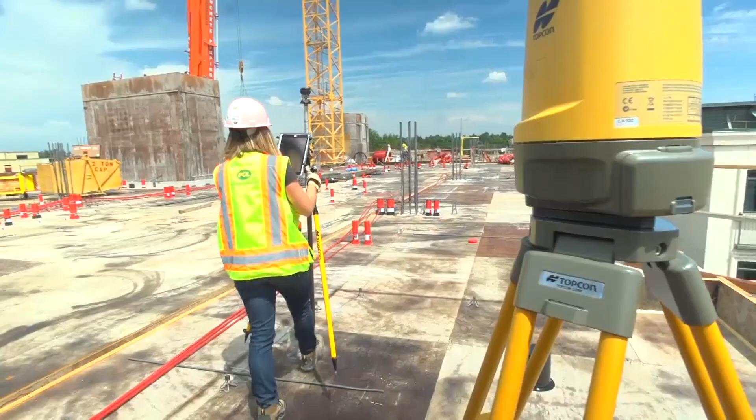You will see a number of benefits using Robotic Total Stations in your layout and quality assurance programs. You will immediately see the productivity gains. You'll see improved quality, communication between the office and field, and client handover.

Anything with risk should be met with an appropriate level of control. There are multiple uses of your Robotic Total Station throughout the construction project lifecycle. At the top level, here's a way to think about the layout and inspection process in 4 steps.

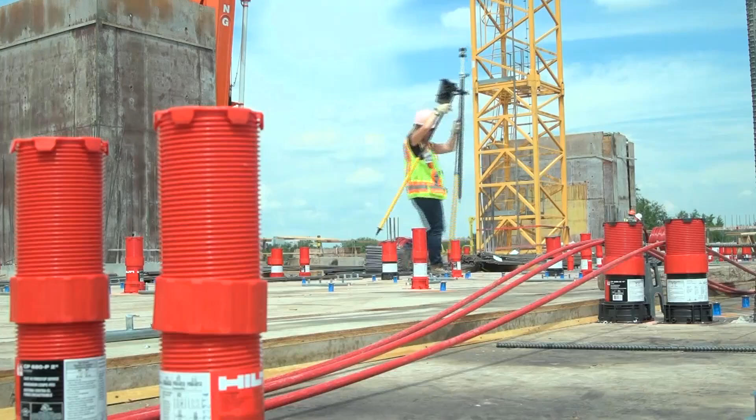After you have completed this course, you will have a strong understanding of the process of using Robotic Total Stations as part of your layout and quality assurance efforts. So, without further delay, let's get started.

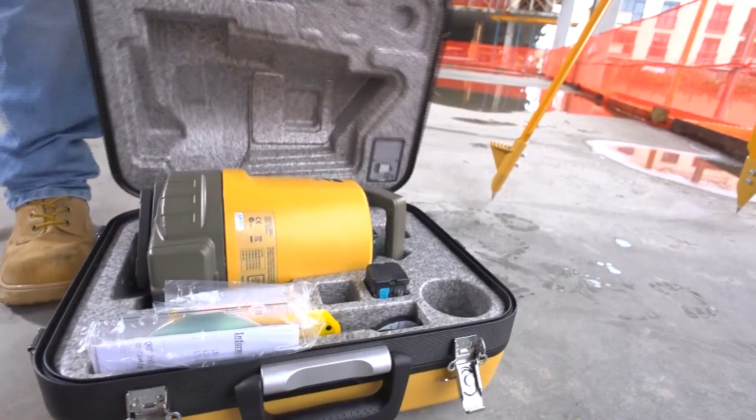This course was built primarily for main contractor project team members who spend the majority of their time out in the field. But it's also relevant to any foremen, surveyors, or site personnel responsible for laying out work or performing quality assurance verification of the placement of specific work.

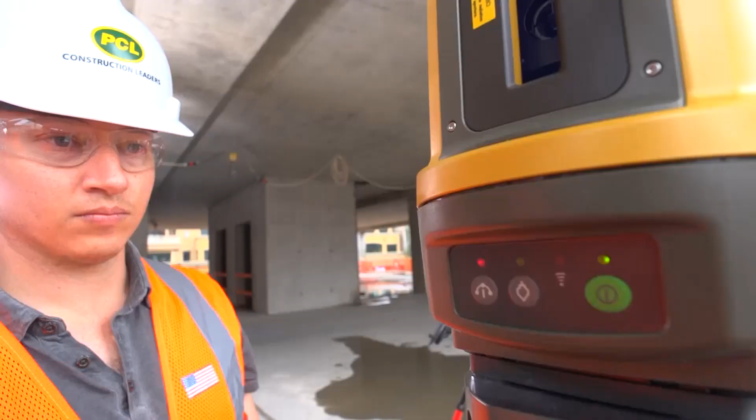Very intentionally, in this course, we will not cover the use of any specific hardware or software. Our goal is to focus on the process. Following this course, if you'd like to learn more about potential solutions, we will provide links to best-in-class industry tools that will assist you and your team.

To get started, we're going to take a look at why Robotic Total Stations are a relevant topic today and discuss the potential benefits for you and your project team. We'll then give an introduction to Robotic Total Stations so everyone has a base knowledge.

To stay consistent with the rest of the courses in the Field curriculum, we will use the PERI model to structure the rest of the course. First, we will discuss how to plan for the use of Robotic Total Stations in your layout and quality assurance workflows. We'll then take a more detailed look at how you'll execute, before we can discuss how you can leverage the digital data collected to report on project and program performance.

As we do with all of our courses, we'll finish by looking at how you can ensure a process of continual improvement.

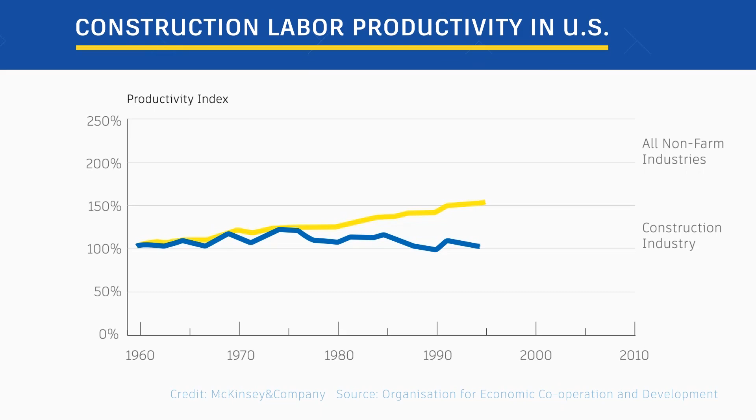More recently, McKinsey & Company, one of the world's top management consulting firms, conducted research on the construction industry and reported similar findings in both the United Kingdom and Germany, demonstrating that this was a global challenge. There are a number of factors contributing to this challenge.

According to a thought-leading construction firm from the Americas, one of the factors is that buildings are getting more complex. You rarely to never build the same thing twice, so you're always working on a custom project. Even if you were to build the same structure, the site is different, conditions are different, there's always something different.

One of the industries with the most positive productivity gains over time has been manufacturing. They conversely will often produce the same product over and over again from a controlled environment.

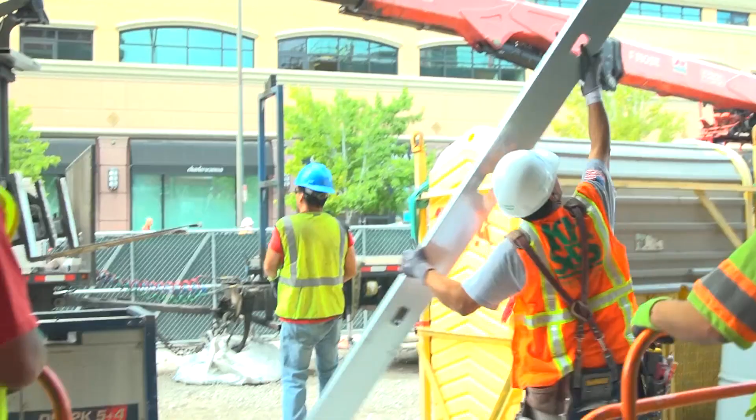Construction has recently begun adopting a number of techniques from manufacturing with the emergence of lean practices, prefabrication techniques, and modular construction. The other big trend we see is the increased use of robotics in construction. The idea being that if we can automate a task with robotics, we can not only address this productivity challenge, but also improve safety and quality.

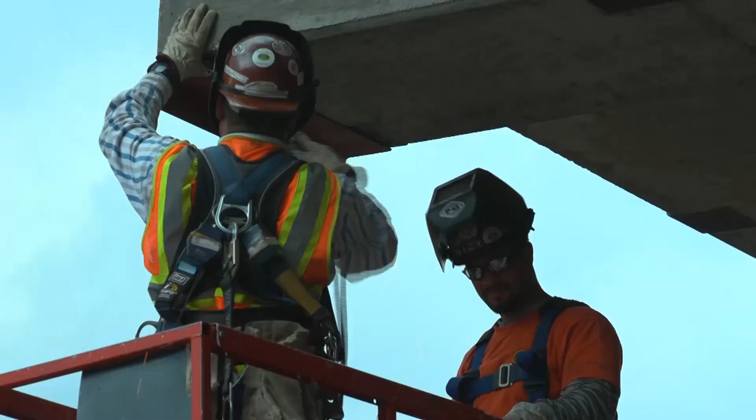Here are some uses of robotics we see in construction today. Unmanned vehicles like trucks and drones, coupled with machine guidance, are being used to not only deliver materials, but also to perform precision earthwork. Special purpose robots are being used for demolition, welding, cutting, drilling, affixing, and even bricklaying. This allows tradesmen like masons to focus on quality, safety, and machine tooling, while the robots do the heavy lifting.

Some uses of robotics are being used to help improve our own physical capabilities. For example, there are exoskeleton suits that help support the weight of heavy tools.

3D printing technology with robotics that can print nearly any shape you could draw largely defray the traditional cost of creating custom parts. These robots are becoming more sophisticated in the materials that they can print and how easily they're tied to design and automation software. In 2015, Autodesk was part of a partnership that 3D printed an intricate steel bridge.

Instead of trying to address all of these types of robots, who are very relevant in construction today, we're going to narrow down our focus for this course and talk specifically about robotic total stations.

You will see a number of benefits using robotic total stations in your layout and quality assurance programs. You will immediately see the productivity gains we discussed earlier, but in addition, you'll see improved quality, communication between the office and field, and client handover.

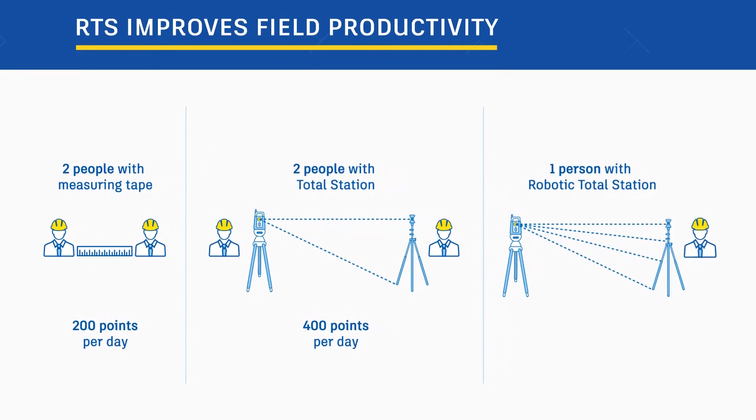You'll find productivity gains both in performing layout of work, but also in the speed of performing quality checks. Any given day, a team of 2 with tape measure and string might average layout or verification of 200 points. With a total station, that same team will average 400 points. With a fully robotic total station, you only need a team of 1, and you're able to lay out an average of 600 points per day. That's nearly 600% more productive.

What is interesting about this is what we decide to do with the time that's saved. One side benefit of going from a 2-person to a 1-person system is that the reduced crew size and time on site leads to decreased risk and improved safety. Resultantly, you'll see improved quality, both through the increased accuracy and additional quality checks you're able to perform with the time saved from improved productivity.

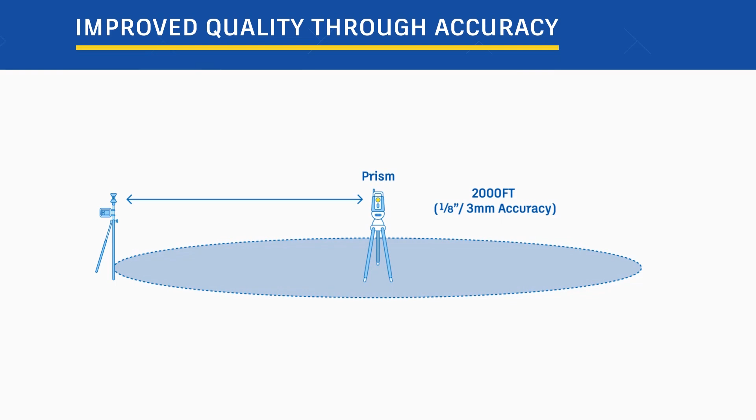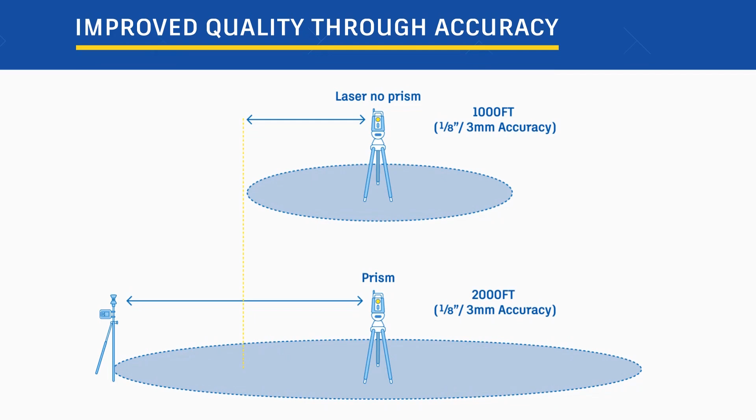Your quality checks will have improved accuracy through the precision measurement of your robotic total station. This precision depends on the way in which you are marking or validating a point, how far away the point is from the robotic total station, and of course, the specifications of your robotic total station. As a rule of thumb, you can get within 1/8 inch, just over 3 millimeters, of accuracy from 2,000 feet out, using a prism and pole. And if you just shoot a laser and are prismless, you can get within 1/8 inch from 1,000 feet out. Of course, if you are at closer range, you'll get increased accuracy.

Since you're more productive with a robotic total station, you can increase the number of points being validated, increasing the probability that you catch something out of conformance and decreasing the risk that something was missed.

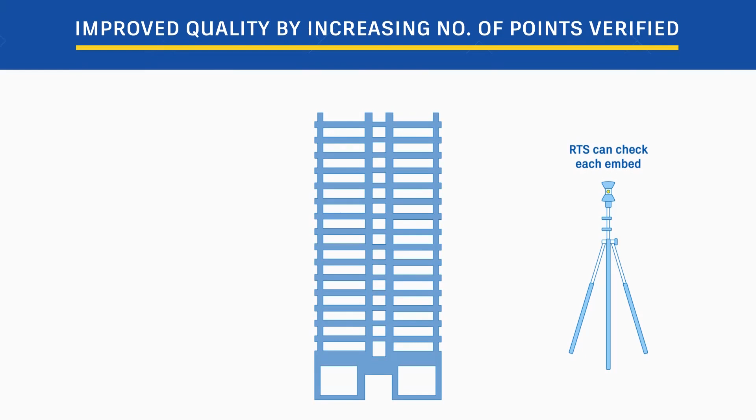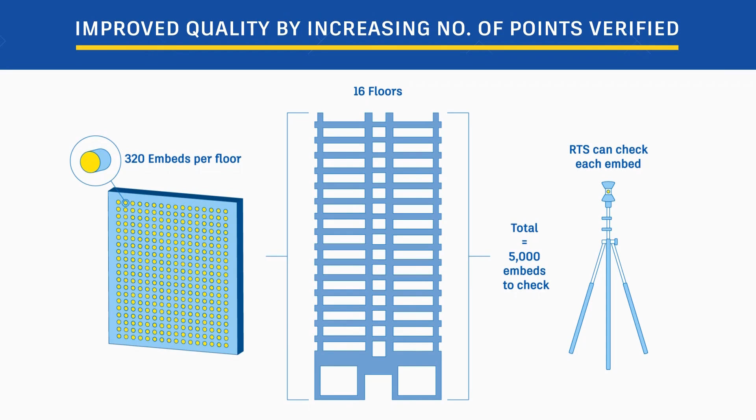On a recent high-rise condo project, a team was using their robotic total station to quality assure curtain wall embeds. There were 320 embeds per floor and 16 floors, totaling over 5,000 embeds to check. Without a robotic total station, they would have verified a sampling of them. But in the same time, with their robotic total station, they were able to check each and every one. Turns out they found 3 misplaced sleeves that required rework, which cost a couple hundred dollars per sleeve.

If they hadn't caught them before pouring the concrete, later in the project they'd have had to scan the post-tension deck for cable first, and then core drill to resolve the issues, costing the project thousands per sleeve on top of the scheduling delays and headaches.

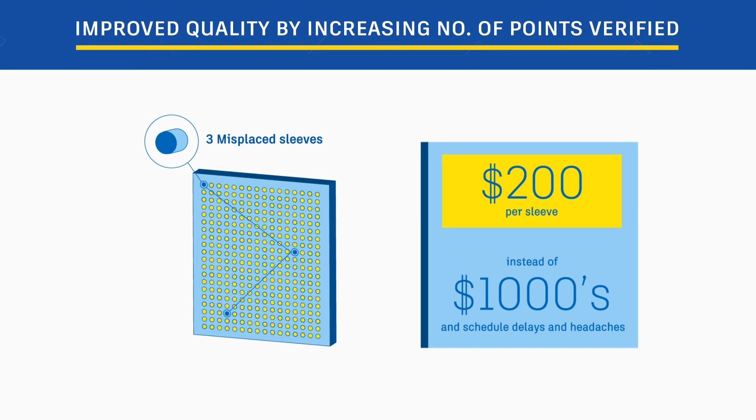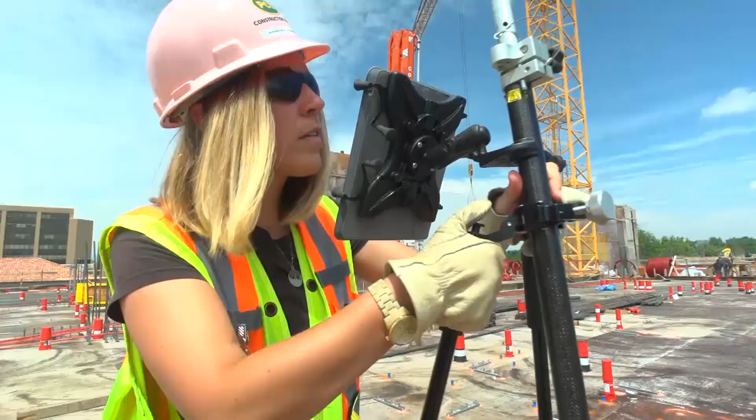Your layout and quality assurance procedures with a Robotic Total Station tighten both the efficiency and communication between your team working in the job office and your team out in the field. The team in the field has improved access to the most up-to-date design information without having to run back and forth to the job trailer, and the team in the office has a better understanding of the real-world conditions and construction progress.

One of the Contech Academy partners from the United Kingdom defines work completion in their quality assurance program as only once work has been verified. They don't pay for work installed. They only pay for work that has been verified.

They have a tight tie between the field verification back to the job office schedule and consequently payroll system. They set up site control and provide their subcontractors access. Then they have their trades use Robotic Total Stations to document the location and effectively completion of their work.

Additionally, you're able to improve the value of your handover. By leveraging the as-constructed information, you can find discrepancies and improve your design information to represent as built rather than as designed. As you can see, there are many benefits to using Robotic Total Stations on your projects.

When one of the Contech Academy partners was first piloting a Robotic Total Station solution, they were working on a project in Hawaii where they were self-performing precast for a parking structure on an educational project. Each of the precast components had a dowel grouted into the sleeve, so that these panels, which were being prefabricated off-site, could arrive and get plugged in.

With 875,000 dowels on the project, based on prior experience, they built in some contingency for a percentage of the dowels being off with natural error, and expected they'd have to rework them by chipping away at the grout, repositioning, and then re-epoxying them so the prefabricated panels would fit.

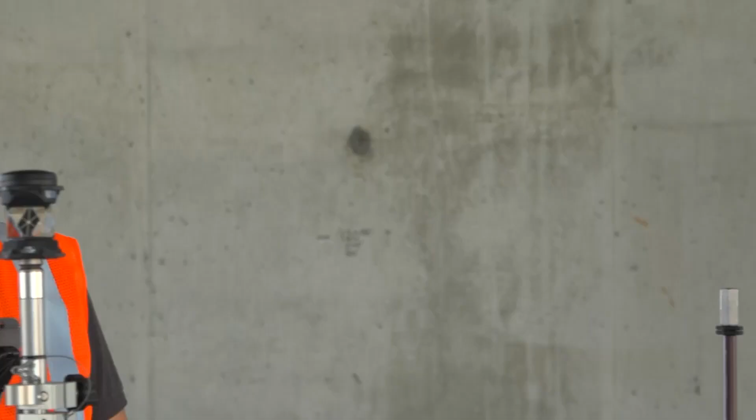Well, using the Robotic Total Station to position the dowels, not a single one had to be reworked. All panels were assembled without delay as soon as they arrived on site, and they completed that body of work 2 weeks ahead of schedule.

Not only did they not incur the cost of reworking the dowels, but they had a number of benefits from completing the work 2 weeks quicker, including the crane rental that was hoisting the panels.

Counting the cost of the Robotic Total Station, which they had rented for the project, the software they purchased, and training for their team using the tool for the first time, the project manager reported back to the business that they had over 10 times return on their investment.

And this was their first project using it, so they had a bit of a learning curve. You can see in this example the productivity gains, as well as improved quality and reduced risk.

What is even more interesting is that this new technique has changed what future bids have looked like, having adjusted their fee strategy.

In this chapter, we've now covered why Robotic Total Stations are relevant in construction, and given some examples of benefits you might receive from its use.

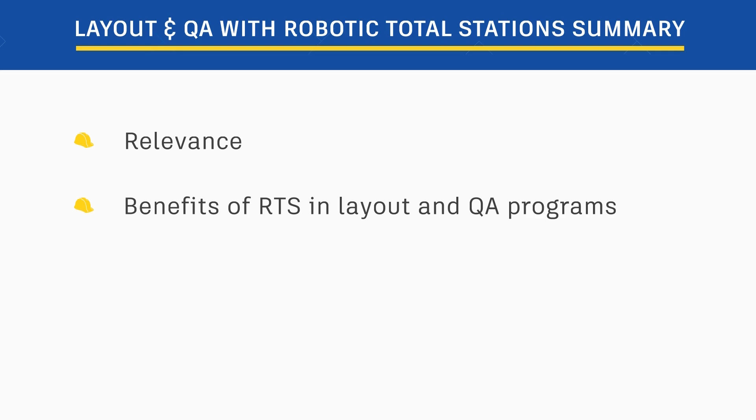In this chapter, we'll give an overview of Robotic Total Stations. We'll discuss some of the basic components, how they're used at different points in the project lifecycle, and then talk about picking the right tool for the right job.

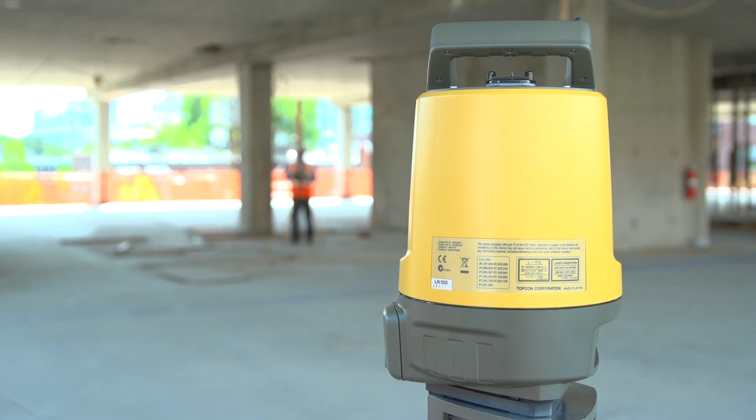Robotic Total Stations vary from a classic total station in that they allow the operator to control the instrument remotely, eliminating the need for a second teammate.

The Robotic Total Station will sit on top of a tripod, traditionally positioned over a known point, commonly referred to as your control point. Establishing control on the site is one of the most important topics we'll cover in the coming chapters. The Robotic Total Station and tripod are stationary, but the Robotic Total Station will rotate around and look up and down to find the point you're verifying or laying out.

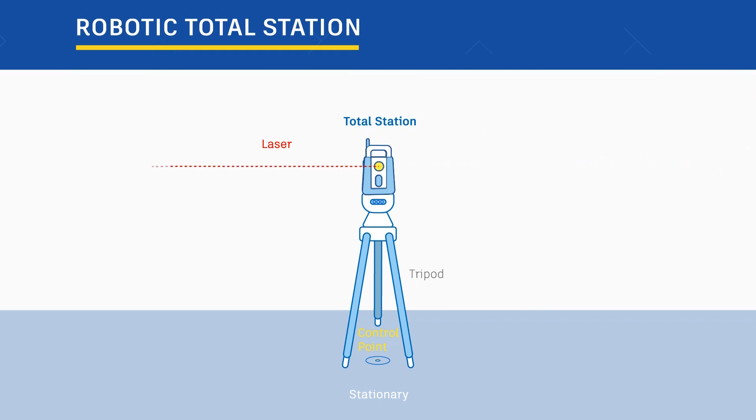The surveyor, foreman, or perhaps site manager will carry around a prism pole. Affixed to the top of the prism pole is the prism. This is what the Robotic Total Station looks for and can follow around by locking onto it with a laser beam.

Once the Robotic Total Station is locked on the prism, when you move the prism, the Robotic Total Station will follow it. When laying out or quality checking the location of a point, the operator uses the data collector or field controller to help navigate, position the bottom of the pole on the point, and then place a marker if laying out, or capture the actual real-world coordinates of the point if performing a QA check. Both the Robotic Total Station and the prism rod have leveling bubbles to aid this.

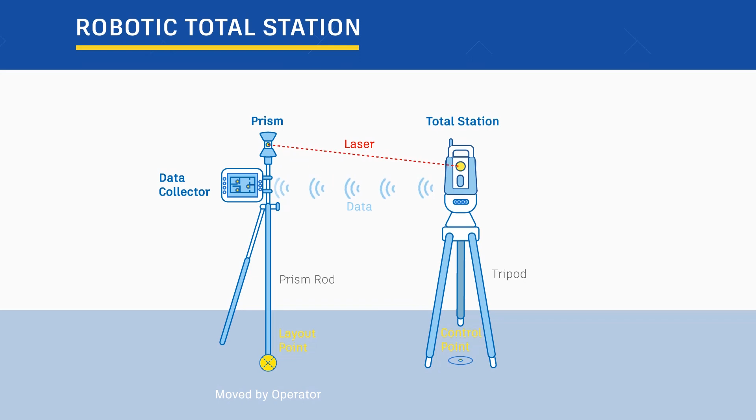The Robotic Total Station shoots a laser at the prism and uses that to keep track of where it moves. The data collector or field controller on the prism pole and the Robotic Total Station send data to one another. Instead of covering setup in this course, we've added a guide to the attached course resources that covers how to set up your total station. Setup procedures may vary slightly from one hardware unit or vendor to another, so I recommend you leverage your vendor to help you get set up the first time you use a Robotic Total Station.

There are multiple uses of your Robotic Total Station throughout the construction project lifecycle. During feasibility, design, and planning, you want to survey and document existing site conditions for analysis. This may be for basics like understanding boundaries, setbacks, and easements, or for understanding existing conditions for design and planning purposes like understanding your grade.

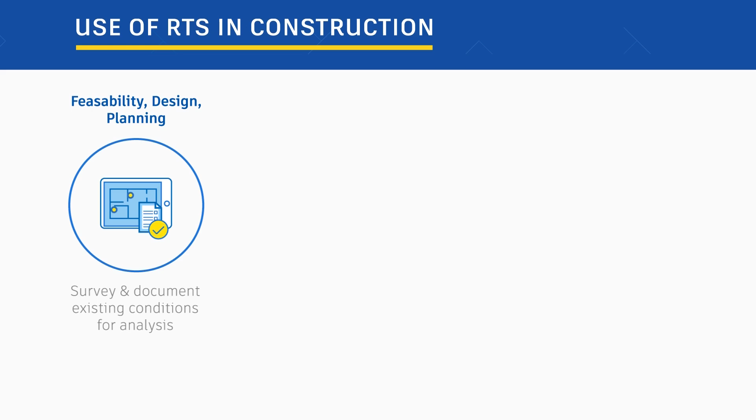Before particular bodies of work are performed, you may use your Robotic Total Station to locate and mark control points from which further measurements are referenced. You'll then want to mark off where the work should occur, using it to lay out, also referred to as setting out or staking out.

Well before you pour your concrete pad, you need to set up formwork so your trades can come place rebar and rough in. You or your subcontractor may use your Robotic Total Station to mark off where formwork is set up, or perhaps where embeds or sleeves should be positioned.

After work has been performed, you'll use your Robotic Total Station to validate that it's placed in the correct spot. Before you pour the concrete, but after your trades have put in place all their work, you must double check the formwork is properly set up or hasn't been disturbed, especially if you have an irregular shape with an arc or angles. You'll also validate or quality assure the actual placement of the embeds and sleeves.

After the concrete is poured, you can use your Robotic Total Station to perform a surface analysis on the slab to make sure there's no slumping.

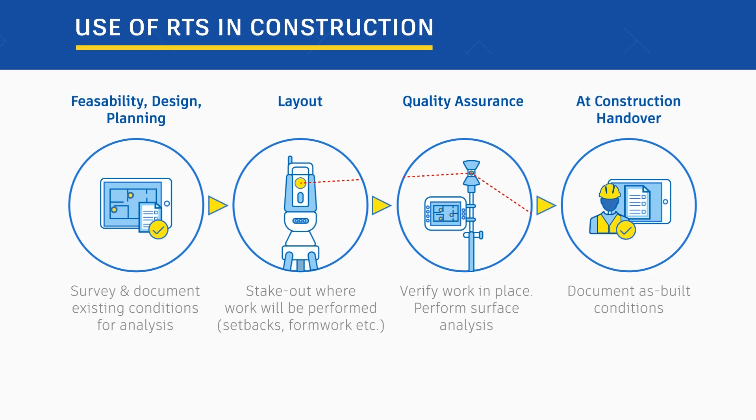At handover, you can improve your client deliverable. Leveraging actual conditions captured, the design documents can be updated for accuracy to reflect as-built conditions with regard to placement of utilities or assets, for example.

It's important that you pick the right tool for the job. Now that we've covered some example uses of your Robotic Total Station over the course of the project lifecycle, think about what your project team or teams will be using the machine for. There are a number of factors to consider when comparing Robotic Total Stations. Here are some you should think about with regard to your particular use.

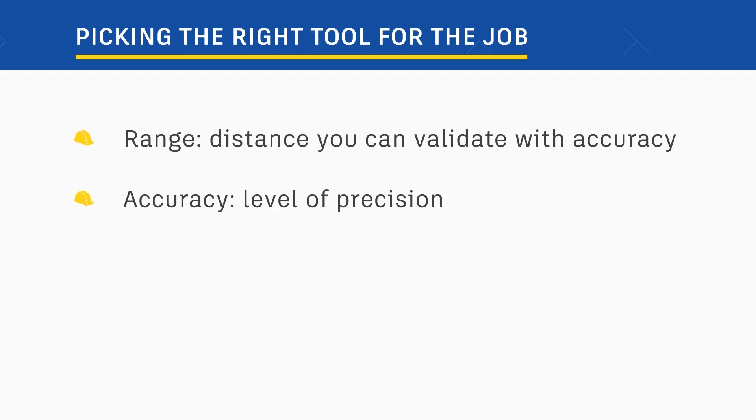Two of the most obvious are range and accuracy. Range speaks to how far away the Robotic Total Station can validate points with the level of accuracy you require. You should think about the average and maximum distance between your known control point and the points you are laying out or validating, and what level of precision accuracy you'll need.

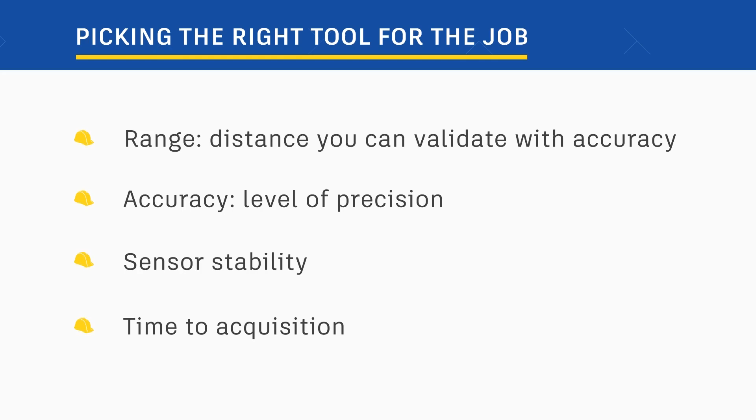Sensor stability is an important topic, but it isn't always thought of. You want to get set up, have the Robotic Total Station find your prism, and then get on with your work without interruption. In real-world practice, there are going to be some disruptions. Maybe someone walks between you and the Robotic Total Station, or you walk around a column and lose what is referred to as lock on your prism, and so you have to reacquire it, which takes time and disrupts your work. Some Robotic Total Stations manage this better than others.

The time it takes the robot to find your prism, also known as time to acquisition, determines how quickly you can recover from an interruption.

Battery life of your robotic total station should be considered. Carrying around a couple extra heavy-duty batteries so you can get a day's worth of work done in the field without coming back into the project office is a hassle.

Basic ease of setup of the entire unit, including both the hardware and the software, is a factor. The hardware for setup of the unit, and software for its ease of getting the design information and point verification data to and from the robot, is important.

Most software tools have a basic level of compatibility with all the major hardware vendors through basic information exchange, but more detailed access to the design information for reference is very helpful to your field team. Some systems will only give your field team basic grid and column lines. Others will leverage 2D design information, and the best systems will give you access to 3D design information.

The communication range, or distance and accessibility of design and point information, is important. Some robotic total stations require reliable access to Wi-Fi, which is not always feasible. Other systems might rely on Bluetooth communication. You'll find that if you can get a reliable Wi-Fi signal, you'll have more responsive navigation.

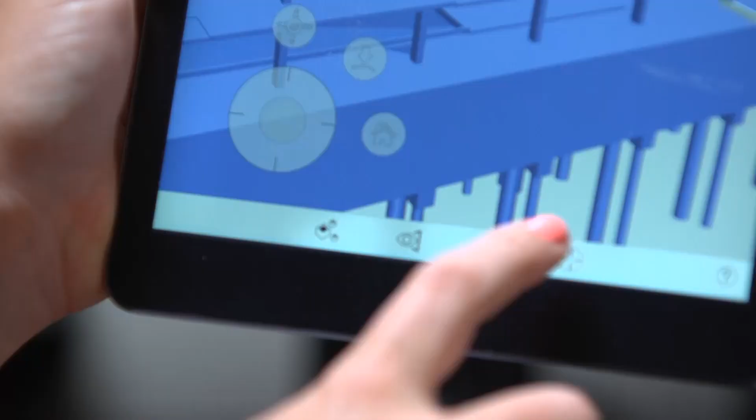First things first, you have to plan out what you're going to use your robotic total station for. You need to know where you're going to set control points so that your design team has time to incorporate those points into their design documentation. If they know about which points will commonly be validated ahead of time, they can embed them into their design tool families, so they're always there automatically.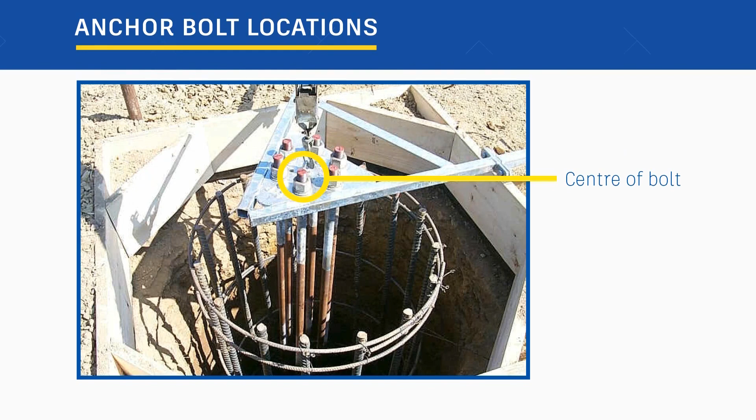As a starting point, some very commonly laid out and verified points are anchor bolts, embeds, edge of slab and footings, wall studs, hangers, piping sleeves, stub ups, or any penetration points.

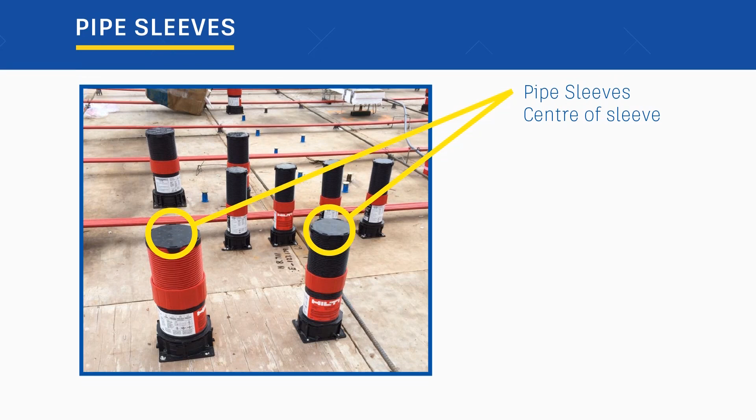Once you've decided what is worth checking, you want to be realistic about where you'll check them. For example, you may agree that you will validate the top center of an embed plate, or the center of the track for drywall studs. Traditionally, sleeves and embeds are almost always verified, since they are so important, but other things may be less important or span a large area, so you will want to pick some sample points. For example, you may only shoot 5, 10, or 15 points along a run of utilities.

Developing more formal guidelines for deciding what points will be laid out and what points will be quality assured and verified on a particular project will help you keep your team on the same page and create a baseline standard for quality. Often, the design and quality teams will work together early in the project to set some basic standards of types of components that require points so that the design team can easily incorporate them.

Then, as the project team moves to the execution phase and work begins, every project is unique and things are going to happen. There'll be changes, or perhaps particular trades start having a hard time, and your original plan may need to account for these factors.

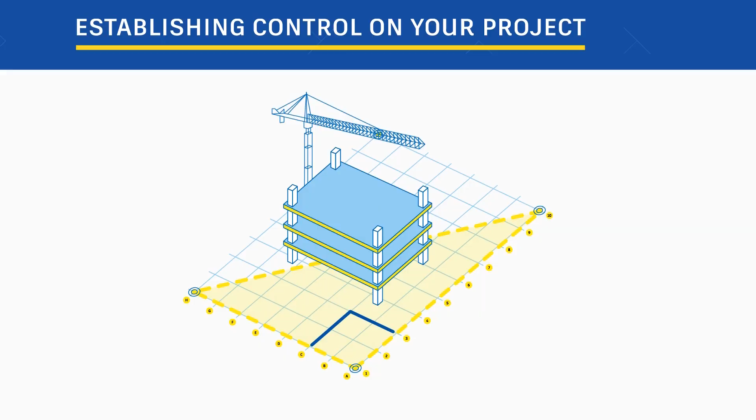Establishing control on a job site is the act of physically checking all the control points necessary to continue your work. Never trust that control points are accurate until you have checked them yourself.

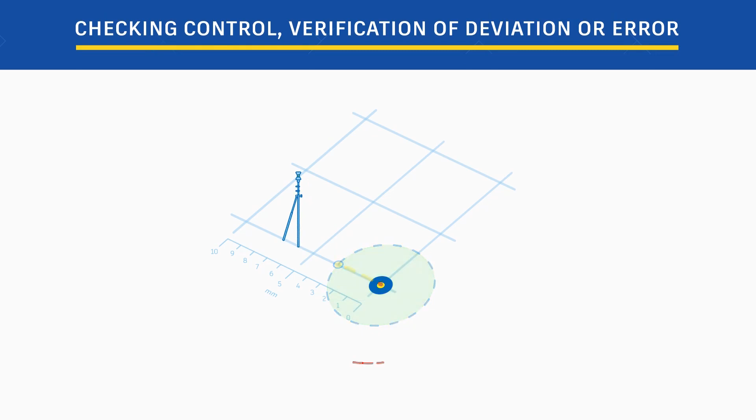When checking control, verify the error or deviation between the design file and the total station measurement. A deviation of 0 is optimal, but normal real-world conditions will leave us with about a 3 mm or 1/8 inch deviation. Deviations of 6 mm or 1/4 inch or more need to be verified and noted.

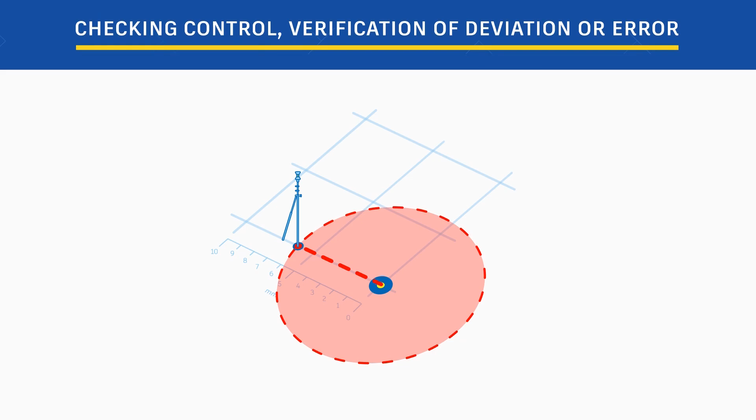Best practice is to check the distance between 2 points as well as the angular accuracy with respect to a third point. When your team is deciding where it will place control points, think about accessibility and longevity.

For accessibility, think about where you will have points you are going to want to lay out and verify with consideration of line of sight. For longevity, it's best to establish control that will last. Every time you move control points, you're opening the door for error.

Successful layout and location validation, with or without a robotic total station, requires strong collaboration among stakeholders. The design team needs to be on the same page with one another, and then they need to ensure there is strong collaboration with the field team.

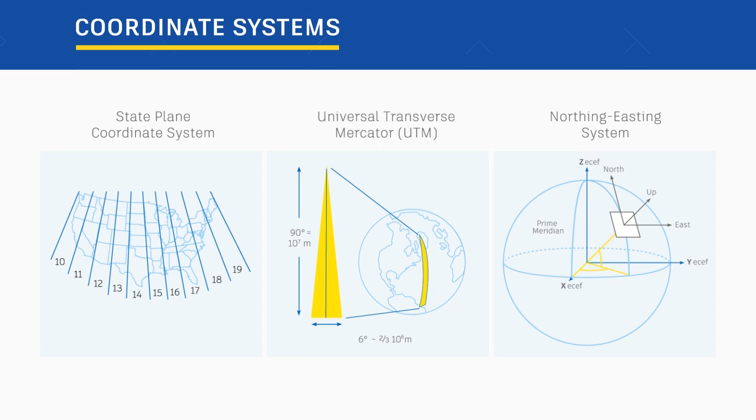For your design team, alignment starts with ensuring all design team stakeholders are working off the right coordinate system. They may leverage state plane, Universal Transverse Mercator (UTM), or a northing easting system. We won't cover this in detail in this course, but instead have added reference resources to help your design team.

The design team also needs to ensure strong collaboration with your site personnel who are carrying out the work and the validation. This starts by working with their QA and site team to identify what points are worth laying out or validating so that they can ensure they're represented in the design documents. Constructability reviews are a great forum to have these types of conversations. Then, throughout the project, there should be regular bi-directional communication.

The design team ensures the field team has access to the most up-to-date design documents at all times and is sure to highlight any changes, while the site team feeds back real-world conditions and raises issues for conversation when constructability and design are out of alignment.

For your site team, just as important is alignment with their trades and subcontractors. They need to ensure the design information is communicated and there is clarity. Also, they need to ensure there is an expectation of level of quality and what controls should be in place. Often, the trades and subcontractors will be the ones using the Robotic Total Station for layout and their own quality assurance, so the main contractor will want to make sure that site and project control are properly established and accessible to them.

In this chapter, we covered a number of the things you'll want to plan for heading into executing on your layout and verification processes with Robotic Total Station. We discussed how to determine what points need to be laid out or verified, establishing control, and ensuring alignment among stakeholders.

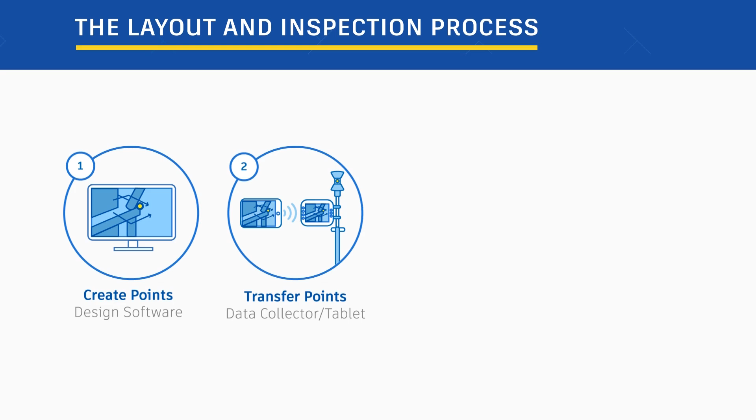Both the process of laying out and the process of quality assurance validating points with your Robotic Total Station are the same. At the top level, here's a way to think about the layout and inspection process in 4 steps. Step 1, point creation. Your design team needs to represent or create the points in the design documentation. Step 2, transferring points. That information needs to get transferred to the Robotic Total Station or Data Collector. Step 3, capturing points. Your team needs to perform the actual layout or validation of those points.

Step 4, analyzing point data. The actual real-world information about those points needs to be synchronized so that it can be analyzed and managed appropriately through reports. In this chapter, we'll cover how you execute a layout and inspection process with Robotic Total Station, focusing on the first 3 steps.

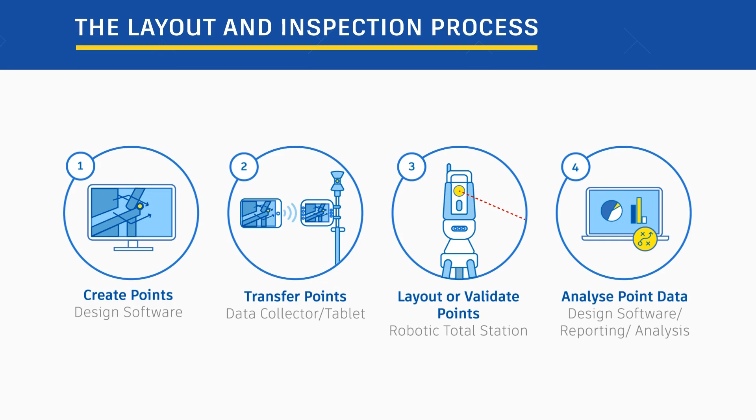Your design team needs to ensure that all points you want to lay out or validate are represented in the design documentation. This can be done in both 2D and 3D design information. You'll need to be involved in this process so that when you are out in the field working with this information, you understand what they are giving you to work with.

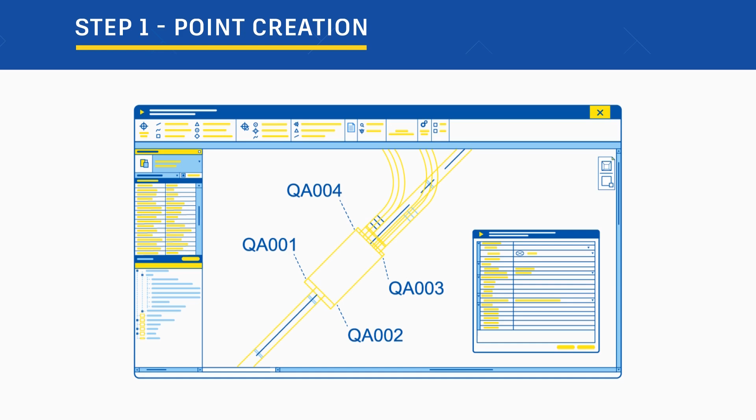Looking at the makeup of a point, there are some common attributes that you want to be familiar with and in sync on with your design team. First, make sure you have alignment on the coordinate system and format. Then, all points should be categorized properly. At a base level, there should be different representation of control points, points to layout, and points to quality assure. All points should have a unique identifier, usually formatted with a prefix and then a number. For example, CP001 might represent control point number 1, and QA0034 might represent QA point number 34.

Other teams may adopt a naming convention that helps describe the object being laid out or verified. For example, QA-SW-001 would be a quality assurance point of a shear wall number 1. Two common prefixes are STK for a staked out point and AB for an as-built point.

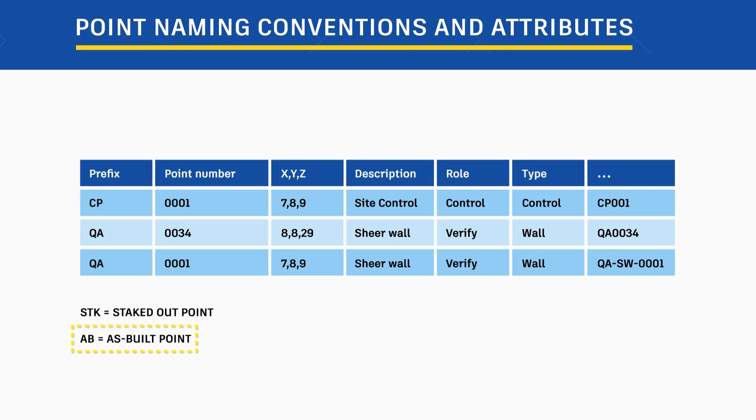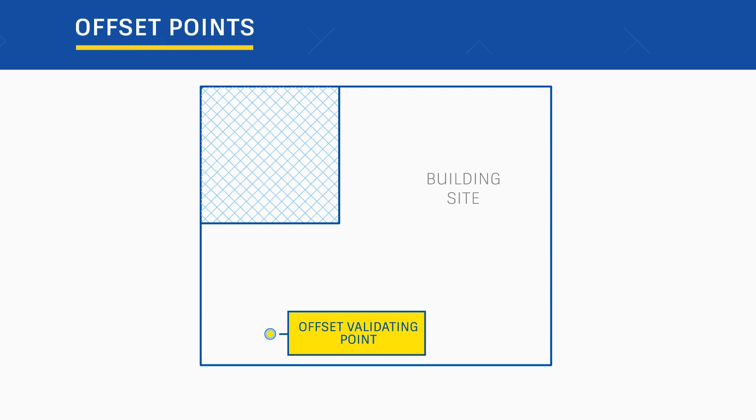Another special type of point is an offset point, which is used when you can't safely access a particular point or it's easier to validate an offset. For example, you might have an elevator shaft and want to verify the opening, but there's a fence around the opening. So thinking ahead, the point is created as a 4-foot offset point from where the opening is to keep the team safe while QAing.

Then, each point should have a property that designates the intended or design coordinates, and a separate place where the actual or real-world coordinates are captured. This is used to determine if there are any differences out of range of a particular tolerance. Optionally, each point might have information associated with it, like description or assignee, representing the person responsible for performing the layout or validation.

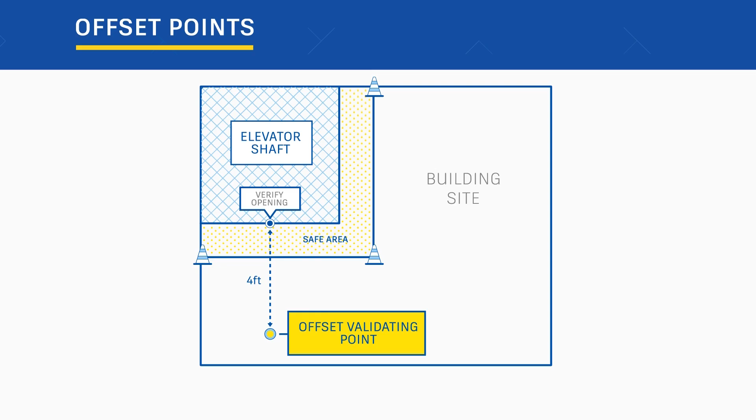Many design software tools have add-ins to facilitate the rapid and accurate creation of points in your design documentation. Of course, points can be inserted manually, but they can also be created as an embedded part of pre-drawn components or model elements. This means that when such objects are added to the design, the points are embedded automatically. Further, you can create a large number of points all at once by creating a rule. For example, you could create a quality assurance point at the center of the opening for all sleeve objects greater than 200 millimeters or 8 inches in diameter in a design file.

Once points have been created, they need to be transferred out to the Robotic Total Station and Data Collector. You'll give it two sets of information. One is the points that have been created. The second set of information is the background design information, including information like scaling.

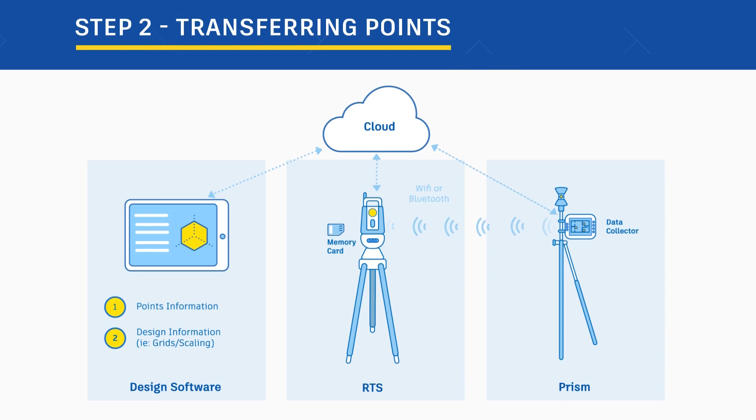Sometimes this design information is basic line work like grid lines. Other times, it's a 3D model. It should be noted that some hardware manufacturers' layout software can only handle certain file sizes and types.

In the simplest form, all layout software, regardless of hardware manufacturer, pretty much universally will accept both the import and export of point information and the design information as CSV or TXT files. The lowest technical way this import and export occur is through a memory card.

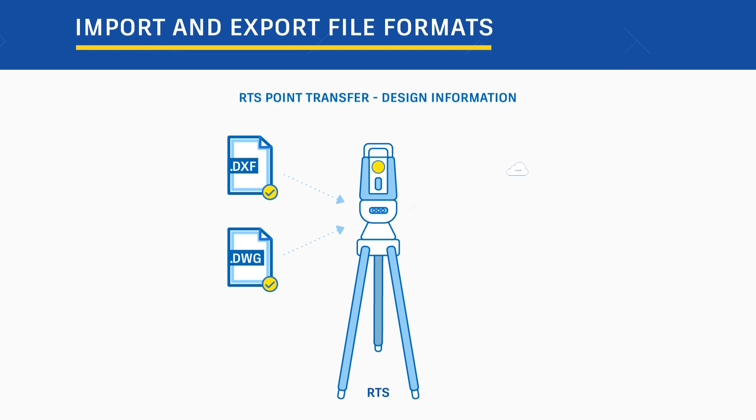Most robotic total stations will accept at least 2D design information using DWG and DXF files. The easier and more common way information is passed in most modern machines is through some cloud-based solution that can synchronize.

Most of the new robotic total stations will accept a 3D representation from a building information model so that you can better visualize where points are or should be. When passing in DXF, DWG, or building information models, be sure that you have set the scale properly, including setting unit of measure, feet and inches or meters.

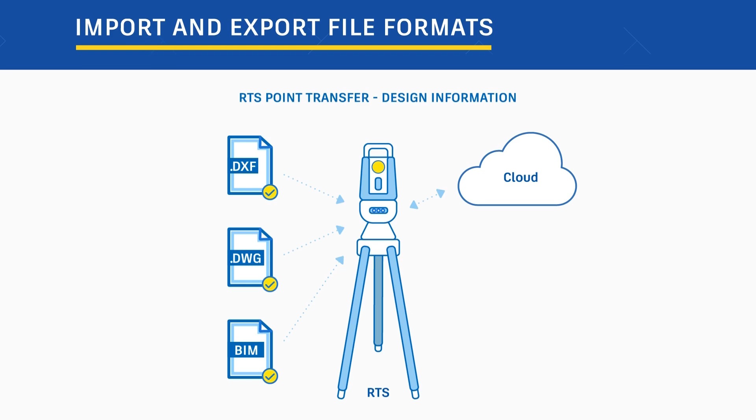There are instances where you'll be out in the field and you want to either back up the work you've done so far, call up the design team and ask them to add a couple other points that you believe should be staked out or verified, or there was a design change and you need to load up the latest information. In these situations, you won't have to run back to the project office if you have a cloud-based solution and your Robotic Total Station data controller has Wi-Fi or a cell modem.

Now you're ready to get to work. When positioning your Robotic Total Station so you can lay out or verify points, there are two basic types of setup: known point setup and reference point setup.

Known point setup is also referred to as occupy point setup, and is when you place your Robotic Total Station directly over top a known point, like a site control or project control point, so that it can orientate itself with relation to the design file. This is the most accurate and fastest way to set up your Robotic Total Station.

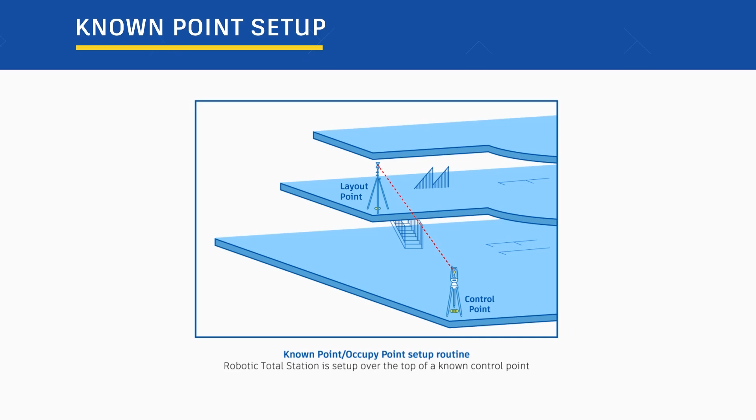The limitation, however, is when the distance between the points you need to verify and your control is too far away, or if there are line of sight issues. For example, if your project has a large elevator core in the middle of the building, and it's in between the points that you're trying to verify and your control point.

When you have these line of sight issues, you can use reference point setup. This is sometimes called resection setup. Here you set up the Robotic Total Station anywhere up out of the way between your control point and the points you need to lay out, where you won't have line of sight issues.

Since you aren't setting the Robotic Total Station up over a known location, it doesn't know where it is in space. So you have to help it out. You have to help it figure out what its coordinates are by shooting directly at a couple of control points, anywhere from 2 to 5.

Once it knows where it is in relation to those control points, it can triangulate where it is in relationship to the design information that you gave it. One side benefit of this approach is that you can set the Robotic Total Station up out of the way in a safe location.

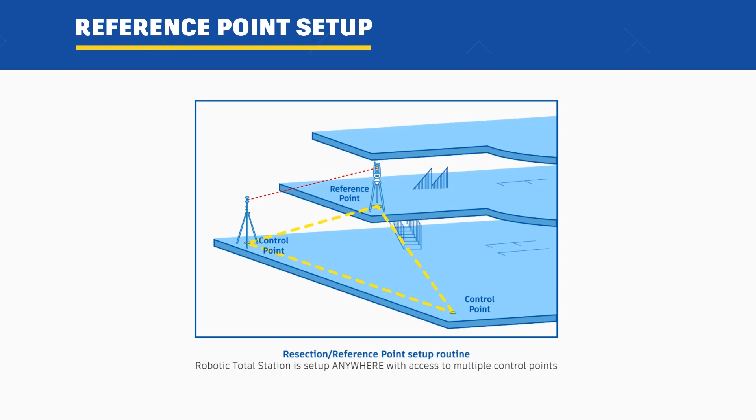Now, when performing layout or verification of points, here are 4 best practices to keep in mind. 1. Check your setup and the level of your total station every 40 shots or so. 2. Try to use the same control points each day. This will help to minimize the propagation of errors.

3. Do not shoot past your control setup. If the control points used are only 200 feet apart, you should not lay out or QA points past 200 feet from the total station.

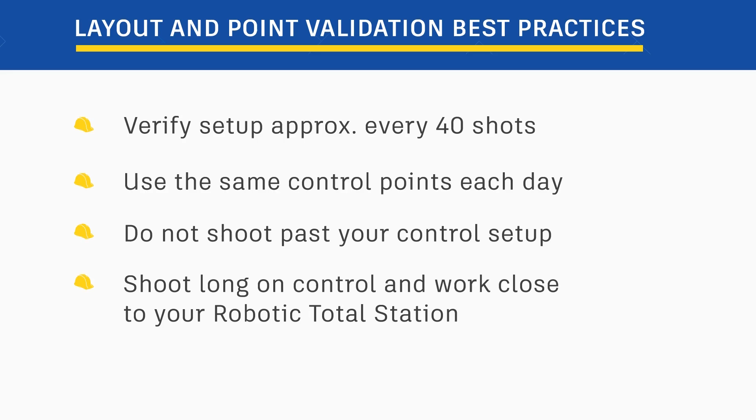4. Shoot long on control and work close to your total station. That is, you have the choice to use 2 control points that are 50 feet apart or 2 control points that are 200 feet apart. Use the set that's furthest apart. Then, when laying out or validating points, try to keep those points closer to your total station for greater accuracy.

In this chapter, we discussed how to execute on your layout and inspection processes with Robotic Total Stations by covering in detail the first 3 steps of our 4-step process: creating the points in the design software, transferring the design and point information to your Robotic Total Station, and then some best practices for laying out or validating your points.

In the final step of our 4-step process, once real-world location information has been captured, we synchronize it back to our design tools, where we can perform analysis and take the appropriate action. In this chapter, we'll discuss a couple uses of this information and give examples of deviation reporting, surface analysis, and the use of project performance reporting with coverage and productivity analytics.

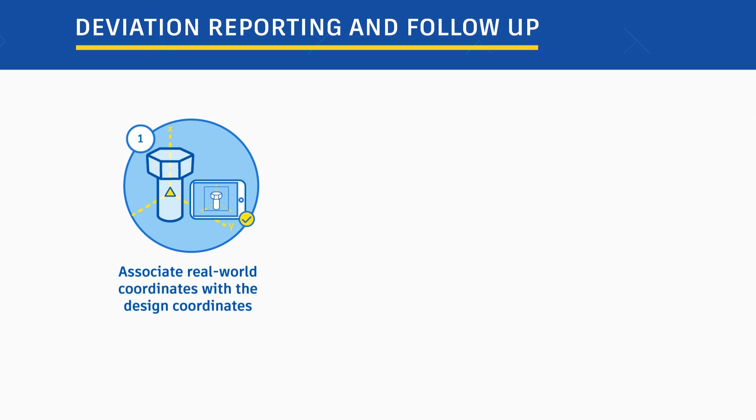With deviation reporting, you're looking for differences between the plan and the actual performance that might have an impact. We do this in 3 steps. First, get the as-built real-world point coordinates back to the design software. Second, for different types of points, determine what your tolerance is. Set a deviation threshold and perform the analysis, looking for discrepancies between the design coordinates and the actual coordinates.

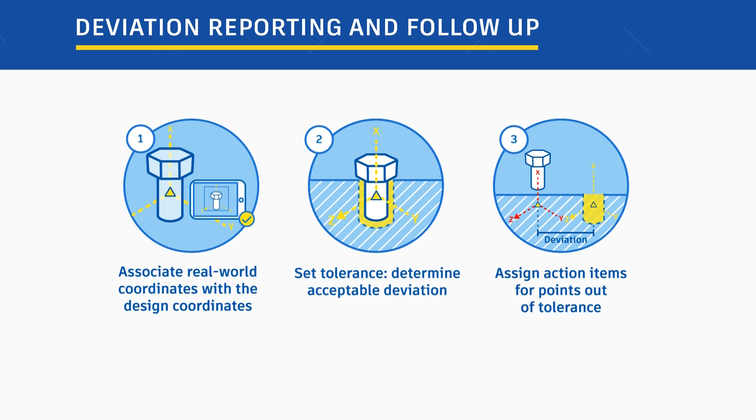Most design software will automate this analysis for you. Finally, if a particular point or set of points is out of tolerance, you have to decide what to do about it. Perhaps there needs to be a conversation, or some form of corrective action needs to be carried out. You should get this list of potential discrepancies from your design team and assign action items, ideally in the same centralized digital issue log you're using to track and ensure resolution to all other quality defects. You can reference our Quality Assurance in the Digital Age course for more details on this.

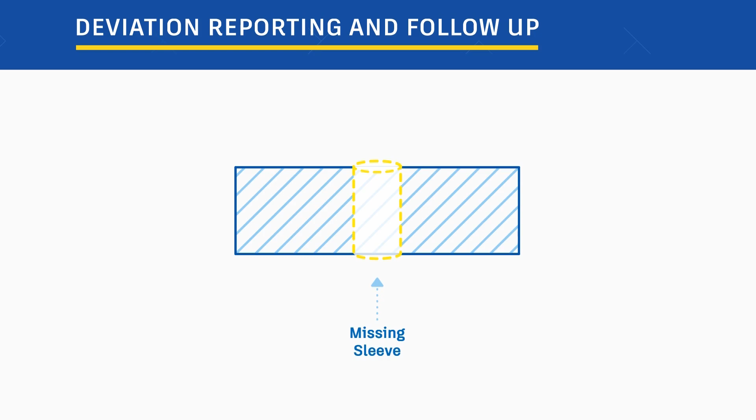Some examples of deviations might be that a sleeve was completely missing, or that hanger number 2 was too far in the project north direction and needs to be replaced. Sometimes this deviation report might be called a cut and fill report because it may tell your team when it needs to cut and fill.

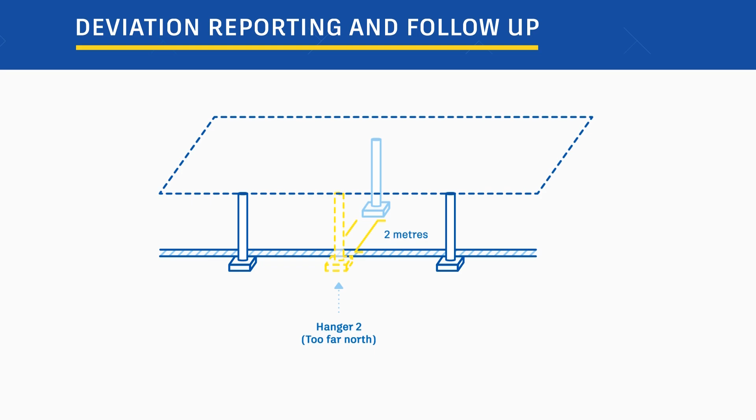Another way to analyze actual real-world point location information is through surface analysis, like a slab or wall analysis. Similar to the deviation report, it's looking for differences between the design or plan location and the actual location of work. But it looks at this by taking samples on a surface. Here are 3 steps to performing this analysis.

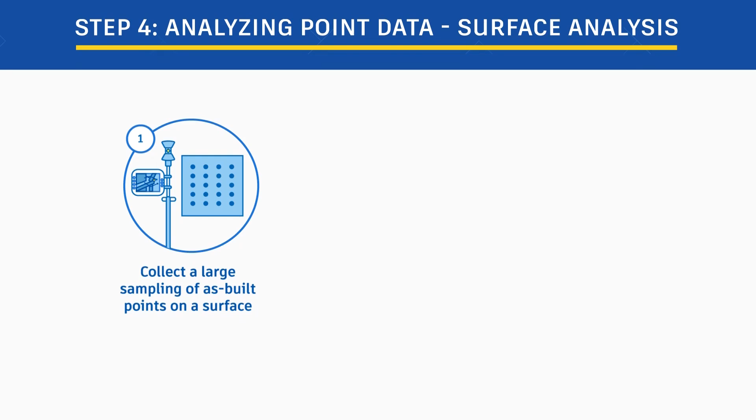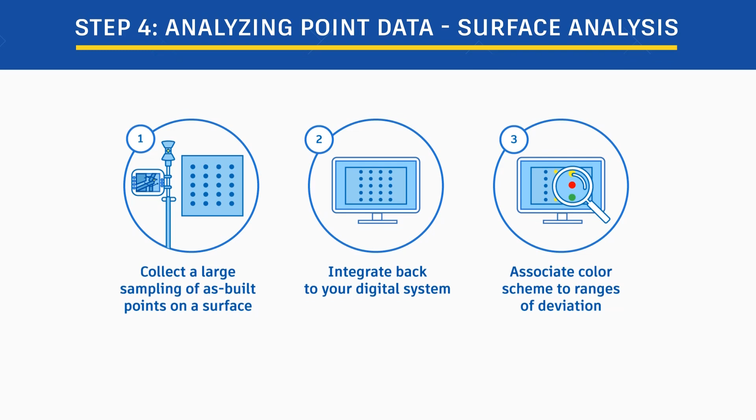First, out in the field, you need to take a large sampling of actual points along the surface. Second, synchronize that information back to your digital design tools. Third, you're going to take a type of deviation report, but instead of setting one tolerance, you'll assign a color scheme to ranges of deviations, traditionally along one axis. Then you run the analysis. The output will be a visual depiction of the surface, colored, showing where you have deviations.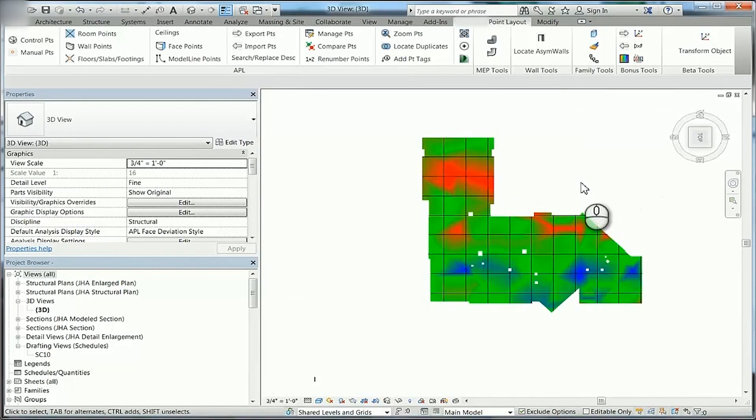If you perform this on a slab, for instance, you might find that there are areas you need to go in and grind the slab down to level. Or go back in and add a topping slab to fill in any low points.

Two of the most basic ways you can use point layout and verification information is to analyze performance in terms of coverage and productivity. Coverage can be measured by counting the number of points verified or inspections performed in a particular area or on a particular body of work. We use this metric as an indicator of risk or exposure in our quality program. The idea being that the more points we have verified, the higher our coverage, and thus the lower the risk that there was a quality defect that we didn't spot.

Another use of this information is to measure productivity of your team. As discussed at the beginning of the course, construction labor productivity is a global challenge. By benchmarking how many points or how long it takes to lay out a set of points without a robotic total station, we can then compare that with how long it takes with a robotic total station. This will help us to quantify the productivity value of the solution. This information is particularly relevant for teams piloting solutions and looking to report back to the larger business on the return on investment.

In this chapter, we looked at some examples of how we use our point layout and verification information to identify non-conforming deviations in our deviation report and surface analysis. Then we discussed how to measure and report on coverage and productivity.

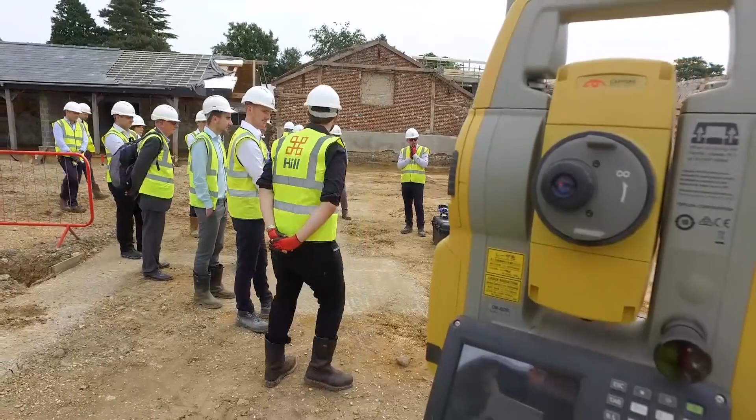On the other side, encourage your BIM or VDC managers to share their knowledge of the design world, including point creation and models. Finally, hardware will change on an annual basis. In order to facilitate continual improvement and keep up with the pace of change of technology, be sure to put in place a regular training program, whereby various topics are covered. Include new hardware training from subject matter experts as just one of these topics. Most times you can engage with your local hardware vendors to help facilitate this training.

In this chapter, we discussed a couple ideas for ensuring a culture of continuous improvement. We talked about taking next steps in using a robotic total station as just another tool in your QA program, strengthening our relationship with our subcontractors, setting up a project buddy system, and facilitating ongoing training.

Great job! At this point, you've completed the site layout and quality assurance with the Robotic Total Stations course and are ready to do the knowledge summary. Here you'll have 5 questions that will touch on a number of the important topics we have covered. Upon successful completion, we will generate and unlock your continuing professional development credit for download.